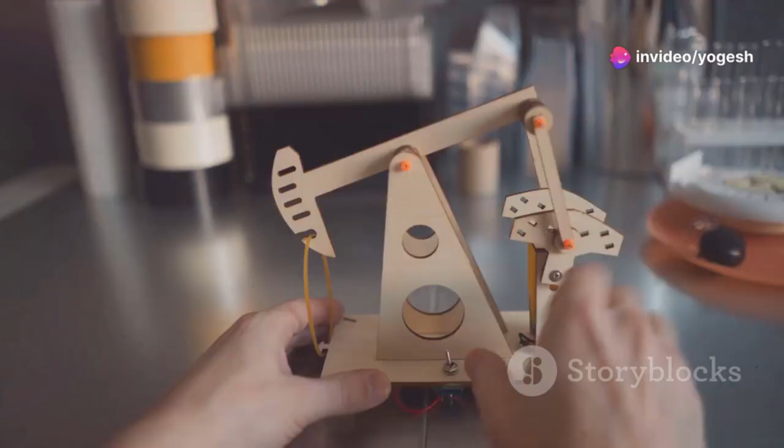Let's talk about simple, elegant mechanisms. Those clever inventions that make you smile when you see them work. Today, we're diving into the pantograph, a deceptively simple linkage that's shaped our world for centuries. Before scanners or CAD, how did people copy and scale drawings? With a physical tool, a set of hinged bars that could trace and draw at the same time.

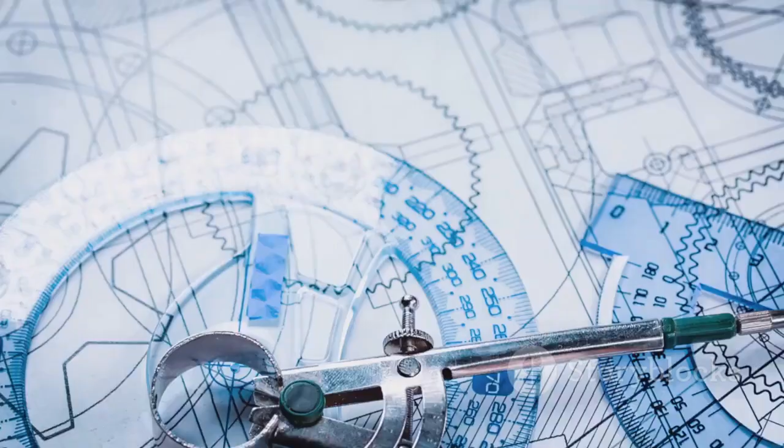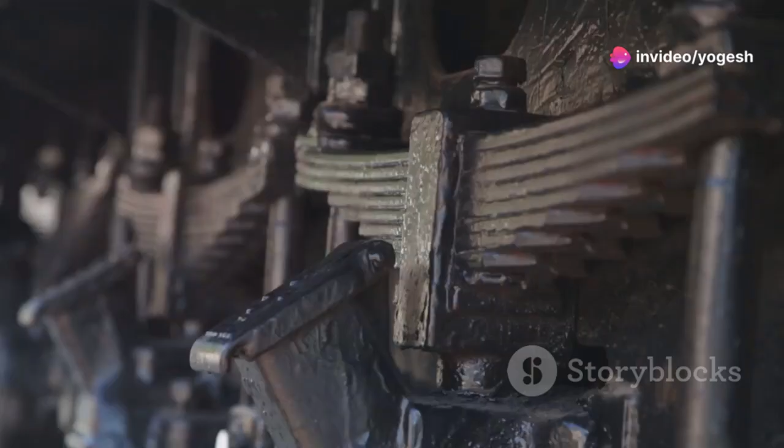This humble device was the backbone of drafting and design, and its principle is still at work today, often hidden in plain sight. That zigzagging arm on top of electric trains, that's a pantograph, a direct descendant of the tool used by 17th century mapmakers. We'll explore how this core mechanical concept evolved from a draftsman's aid to a critical part of modern infrastructure. By the end, you'll spot pantographs everywhere and appreciate the elegance of their design.

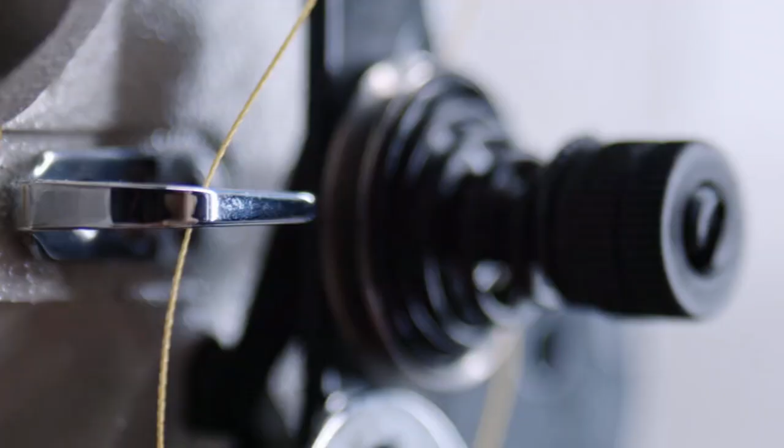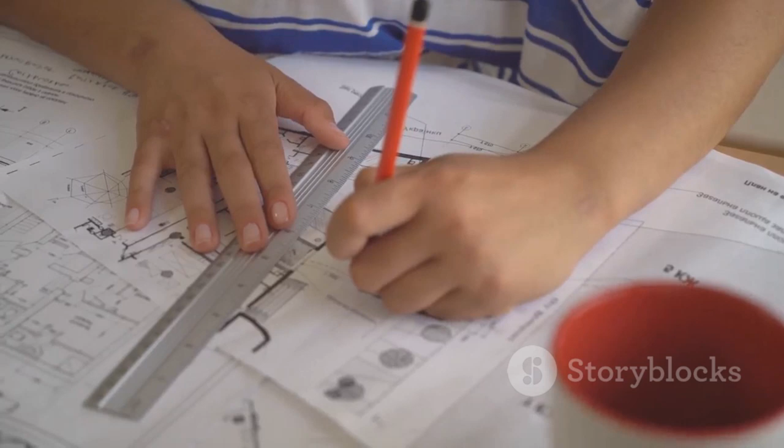So, what is a pantograph? At its core, it's a mechanical linkage of four bars connected to form a parallelogram. One corner is anchored, while two other points serve as the tracer and the drawing point. As you move the tracer along an image, the drawing point mimics the motion, creating a copy. The real magic is in scaling. By adjusting where you attach the tracer and drawing points, you control the size of the copy. Architects could scale up a sketch, or surveyors could shrink down a map, all with this analog scaling machine.

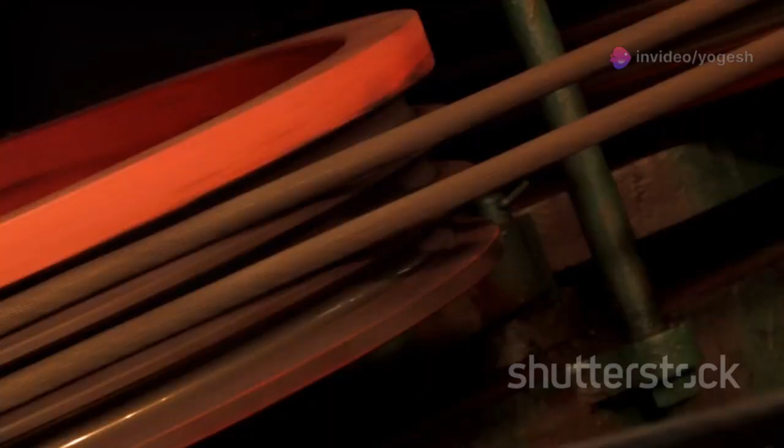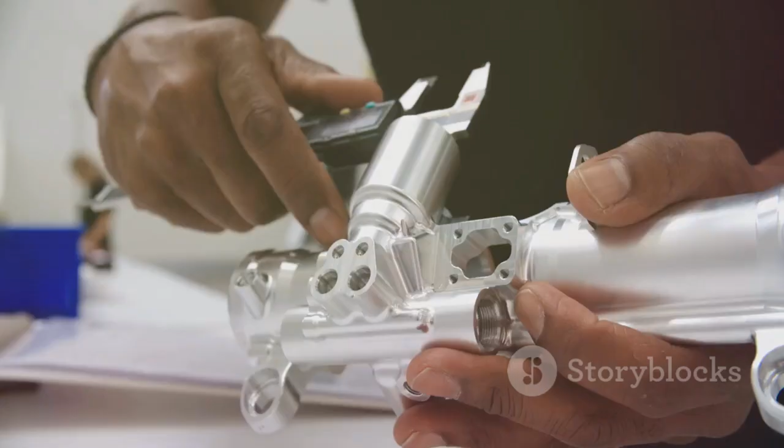Think of it as a mechanical amplifier or reducer for motion. The parallelogram's geometry locks in a predictable, repeatable relationship between the original and the copy. No guesswork, just reliable, accurate results. In a world before digital tools, the pantograph was a guarantee of precision. It's a perfect example of simple rules creating powerful results.

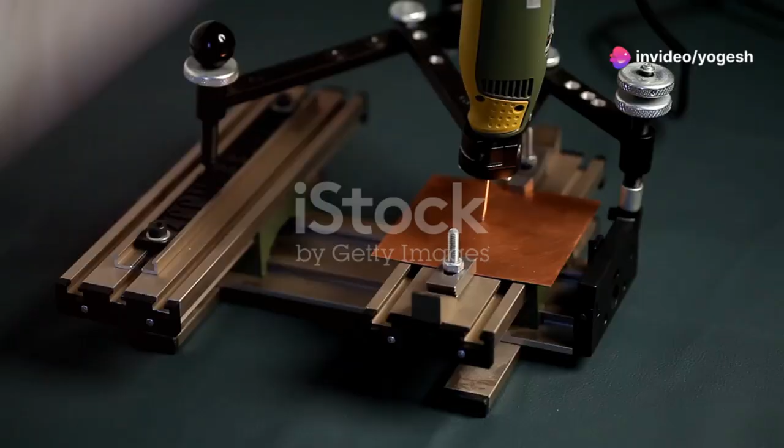Step back to a time before computers, when draftsmen ruled and the pantograph was their secret weapon. Technical drawings were painstakingly created and scaled by hand. One mistake could be costly. Instead of endless measuring, engineers used the pantograph to trace a small drawing and produce a full-size template with perfect accuracy. It worked in reverse too. Surveyors could shrink large maps for reports, preserving every detail.

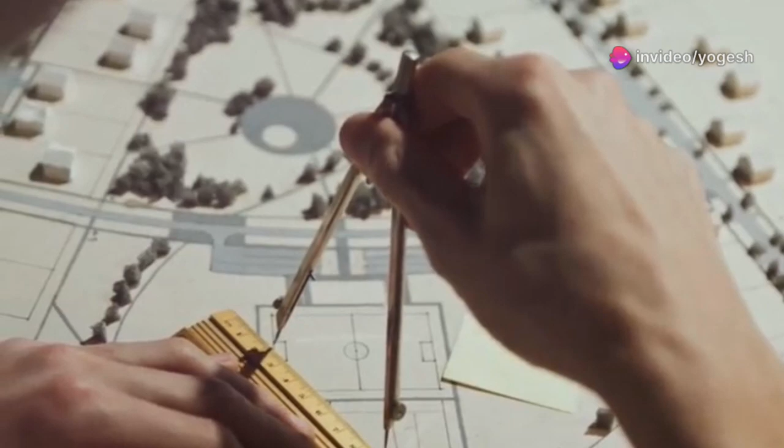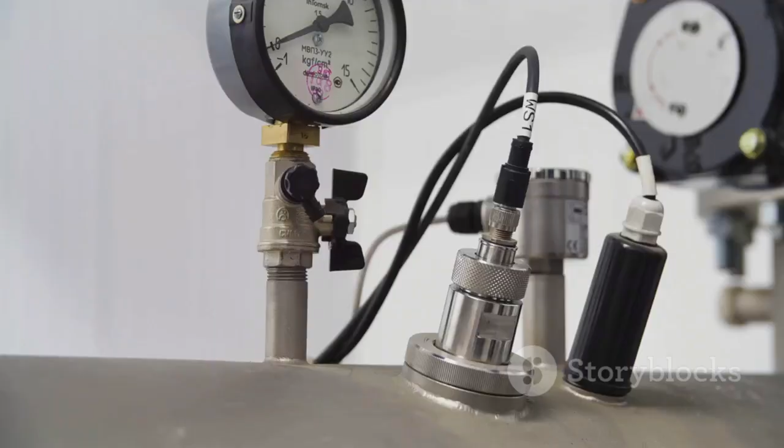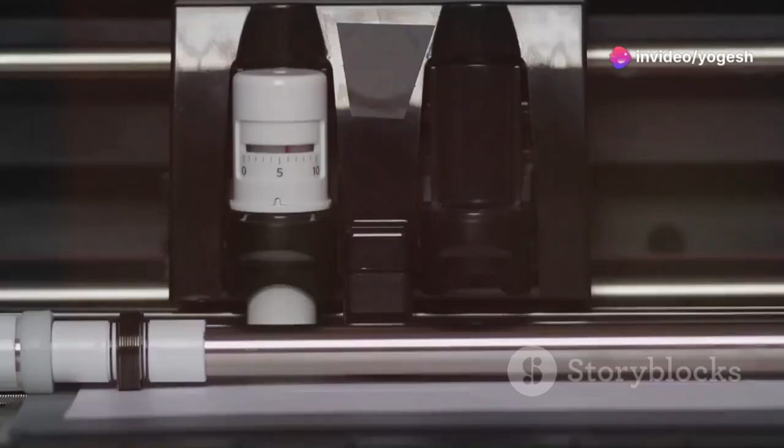This tool bridged the gap between fieldwork and office, fostering a deep, hands-on understanding of mechanics and geometry. Using a pantograph, draftsmen felt the relationship between original and copy, learning about linkages, pivots, and geometric similarity. It was more than a copier. It was a teacher, demonstrating engineering principles with every line. In today's digital world, that tactile education is often lost. The pantograph was a masterclass in motion, right at your fingertips.

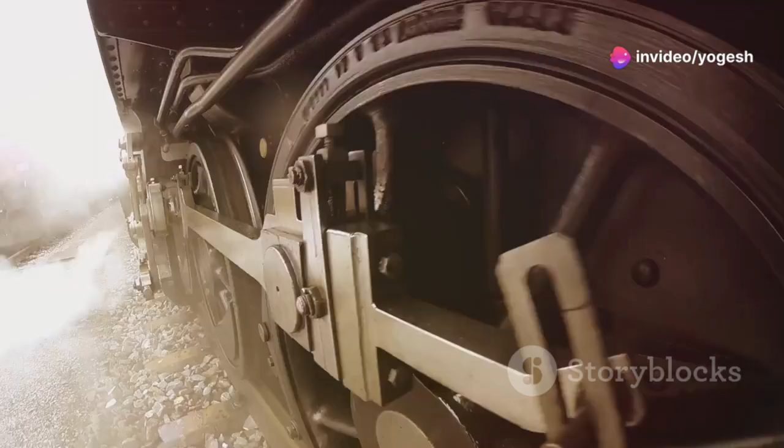Think the pantograph is obsolete? Think again. It's still hard at work. On electric trains, that diamond-shaped arm on the roof is a heavy-duty pantograph, keeping steady contact with overhead power lines as the train moves. Its parallelogram linkage allows smooth vertical movement, ensuring a reliable electrical connection at high speeds and in all weather.

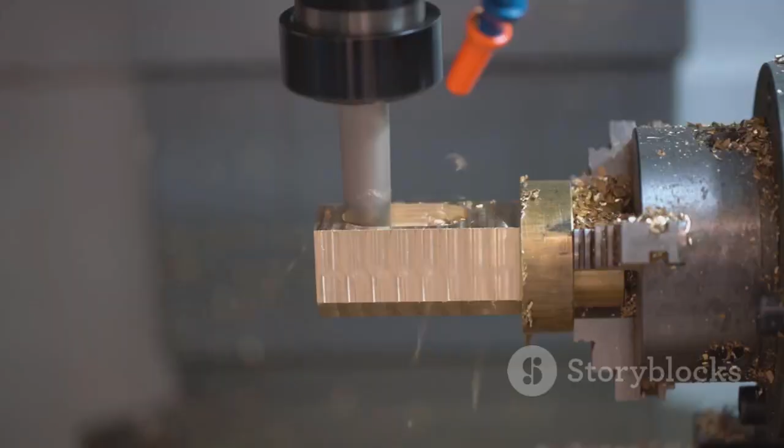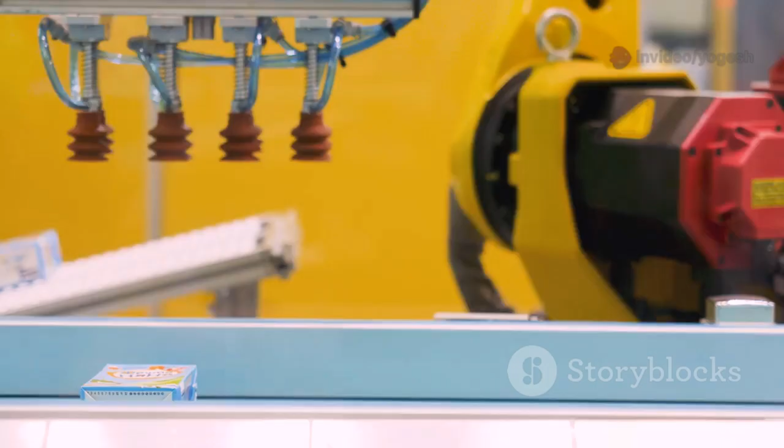In manufacturing, pantograph-based machines let operators trace a template, while a cutting tool replicates the motion, producing identical parts without complex programming. Even in robotics, parallel linkages inspired by the pantograph keep robotic arms level and precise. The next time you see a robot or a train, look for that familiar geometry.

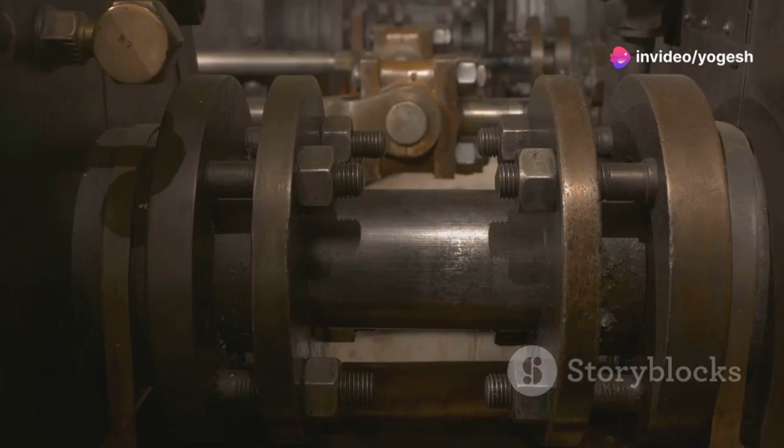The pantograph's principle, replicating and scaling motion, remains indispensable. From delicate drawings to high-voltage railways, its legacy endures. A 400-year-old idea, still powering the modern world.

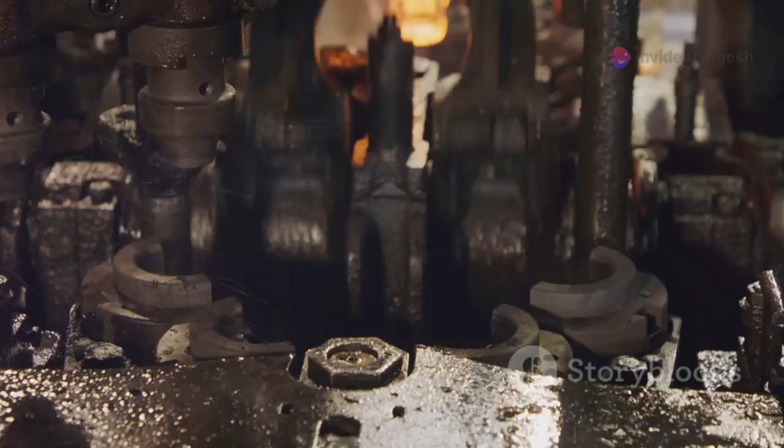How does the pantograph actually work? It's all about the moving parallelogram. Four bars, joined at pivots, form a shape that always remains a parallelogram as it moves. Fix one point, the anchor, and designate the tracer and drawing points. As you move the tracer, the drawing point follows, always in a straight line with the anchor.

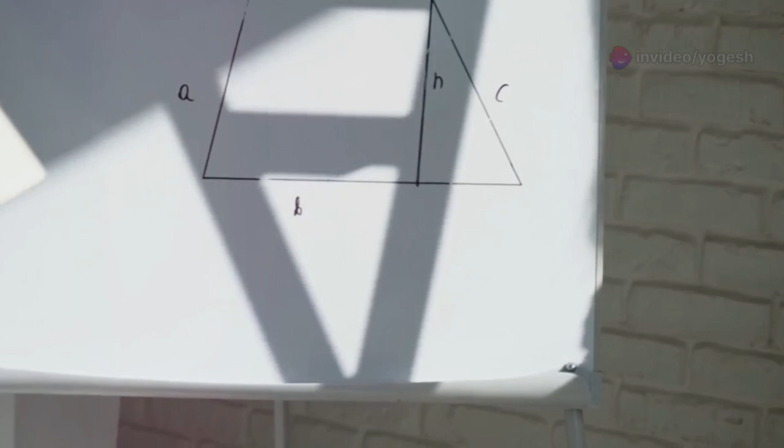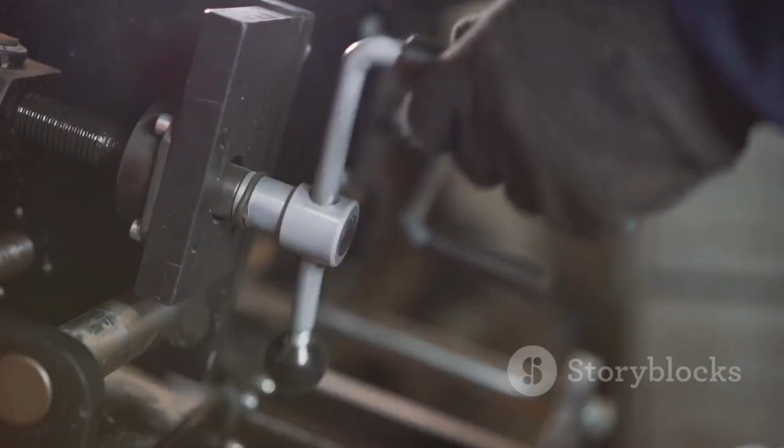The secret is similar triangles. The distance from anchor to drawing point is always a fixed multiple of the distance from anchor to tracer. That ratio is your scaling factor. Double the distance, double the size; halve it, and you shrink the copy. Adjust the pivot points, and you change the scaling ratio. Every movement is perfectly scaled thanks to unbreakable geometric laws. No batteries, no software, just pure, visible math in motion. That's the brilliance of the pantograph.

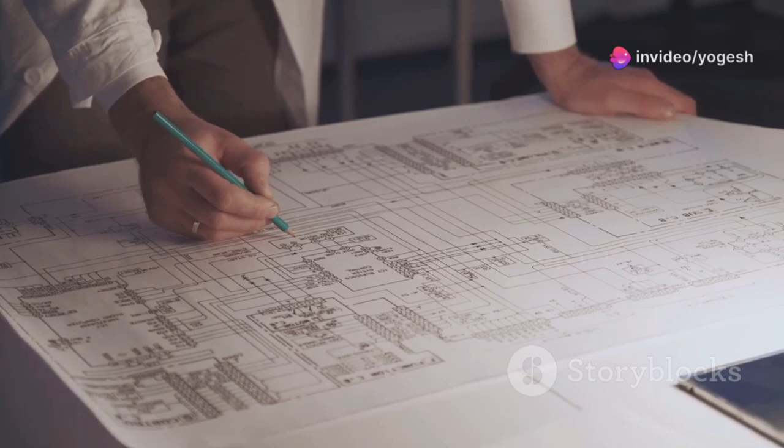When engineers design a pantograph, they use a special language, the engineering drawing. Instead of realistic pictures, they use simple lines for the bars and circles for the pivots. The anchor is marked clearly, and tracer and drawing points are labeled, often as T and D. The drawing specifies the scaling ratio, either directly or through dimensions.

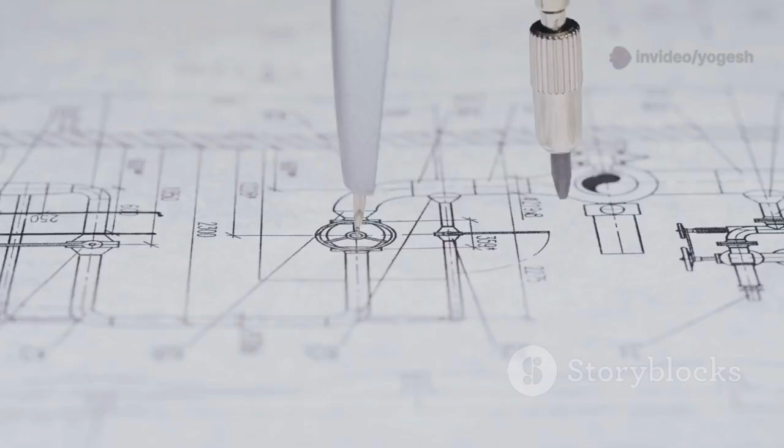This schematic approach strips away the fluff, focusing on function over form. It's fundamental to kinematics, analyzing motion, calculating forces, and understanding how the mechanism works. By reducing the pantograph to lines and circles, engineers can predict its movement and performance. These minimalist diagrams contain everything needed to build or analyze the mechanism's elegant dance.

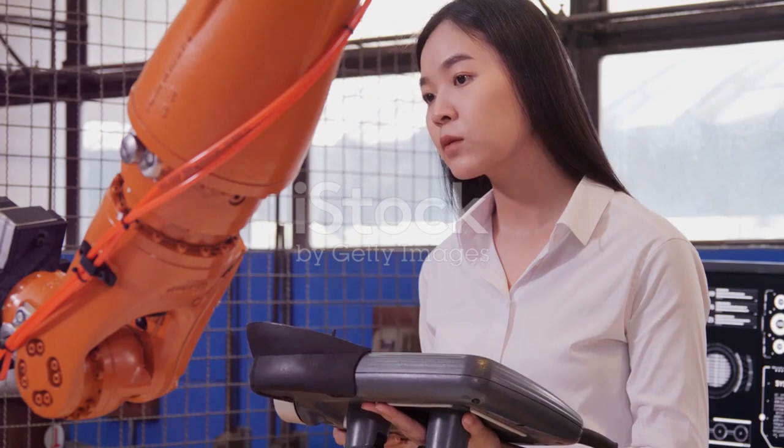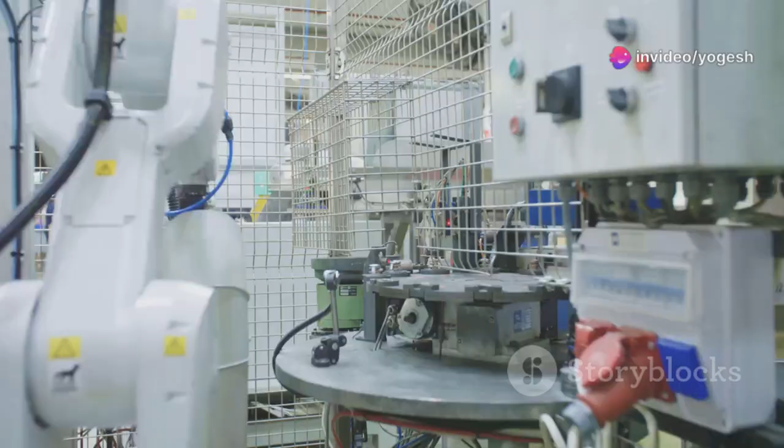In a world of 3D printers and robots, why care about a centuries-old tool? The pantograph is a perfect introduction to linkages, the bones of every moving machine. Building or sketching one gives you a hands-on grasp of motion, pivots, and scaling. This knowledge is the foundation for modern robotics and automation. A robotic arm is just a complex series of linkages.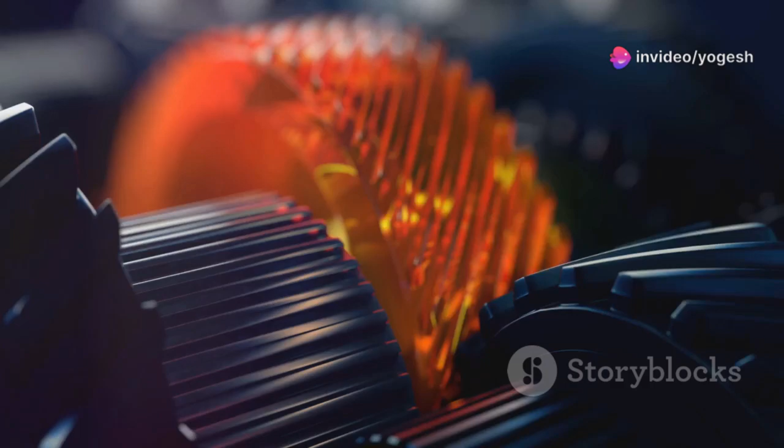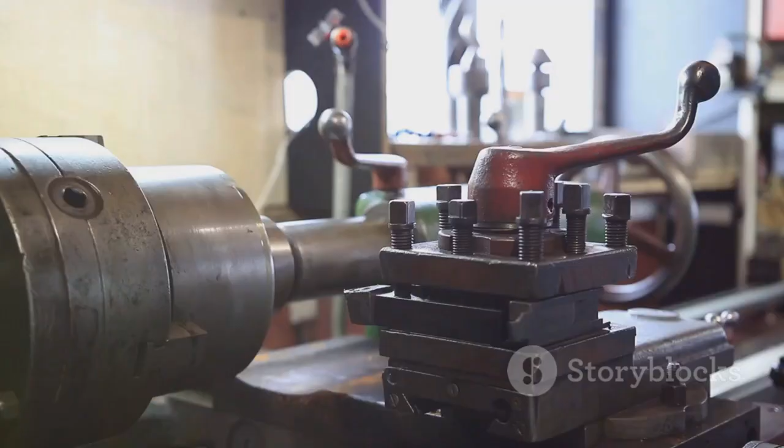Understanding the pantograph is step one. The principles of motion transfer and geometric constraints are timeless. The pantograph reminds us that innovation often comes from mastering fundamentals and applying them in new ways. By appreciating these elegant mechanisms, we connect the past to the future and become better problem solvers.